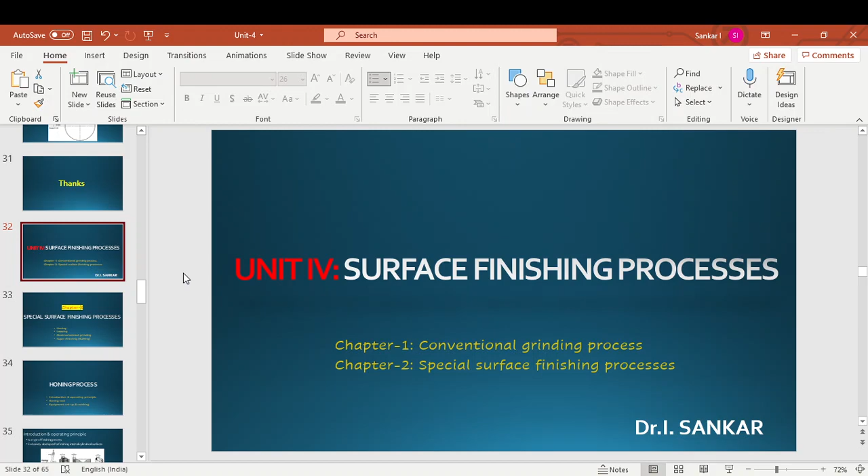We are in the discussion of the fourth unit, surface finishing processes. We have already completed discussing the conventional grinding process, and now we are going to discuss the special surface finishing processes. This is chapter 2 in that unit. We are going to see 4 different topics in that chapter: honing, lapping, electrochemical grinding, and a super finishing process, that is buffing.

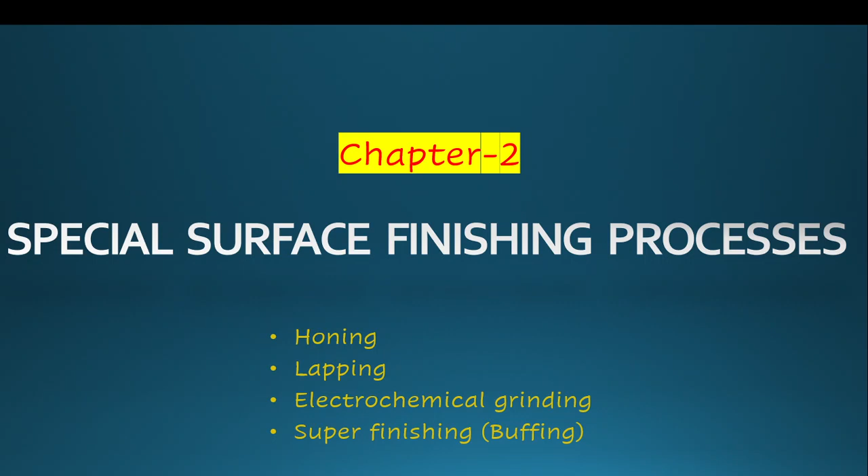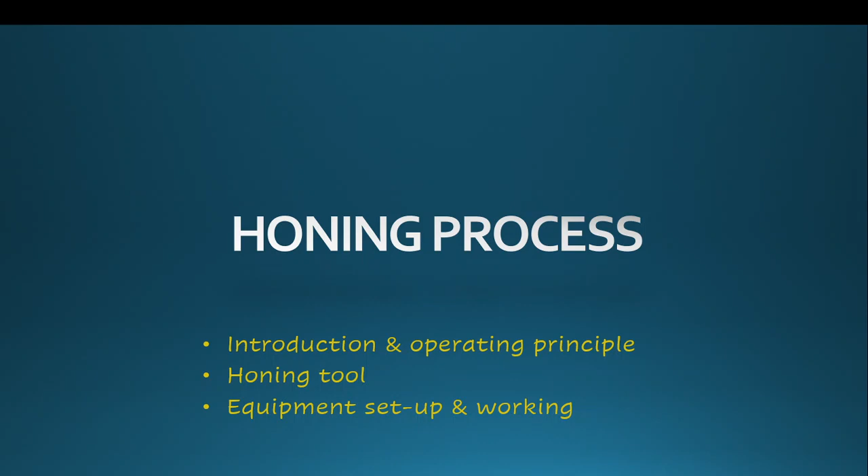First we are going to see the honing process, its basics, the honing tool and the equipment setup. The honing process is a kind of finishing operation. It is developed for finishing internal cylindrical surfaces, particularly engine bore like structures. Here you can see this part is the honing tool, a cylindrical tool loaded with a number of abrasive pads.

These abrasive pads are made to rotate inside the cylindrical workpiece in order to finish it. In addition to the rotation, the honing tool will reciprocate in order to cover the entire inside surface of the cylindrical workpiece. In that way, each and every abrasive particle will form a cross-hatched pattern inside the cylindrical surface. In this way, material removal at the micro level is carried out to finish the surface.

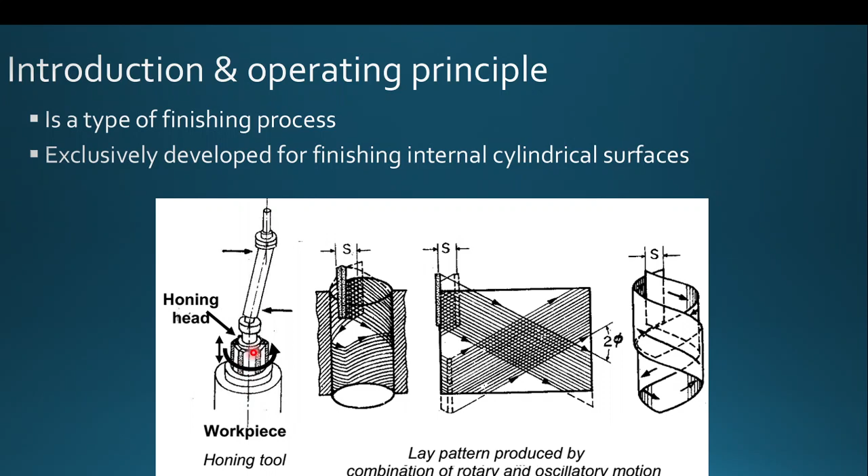The surface finish obtained by this honing process is smoother when compared with the conventional grinding process, and interior surfaces can easily be honed by using this process. This is the photographic view of a honing tool. See, this is the abrasive pad. These abrasive pads are generally on the outer side of the honing tool.

During rotation, due to the centrifugal force developed, these abrasive pads move radially outward to touch the internal surface of the cylindrical workpiece. This is the workpiece. No movement is given to the workpiece in this process. Only the tool needs to rotate and reciprocate inside the workpiece in order to finish the interior surface.

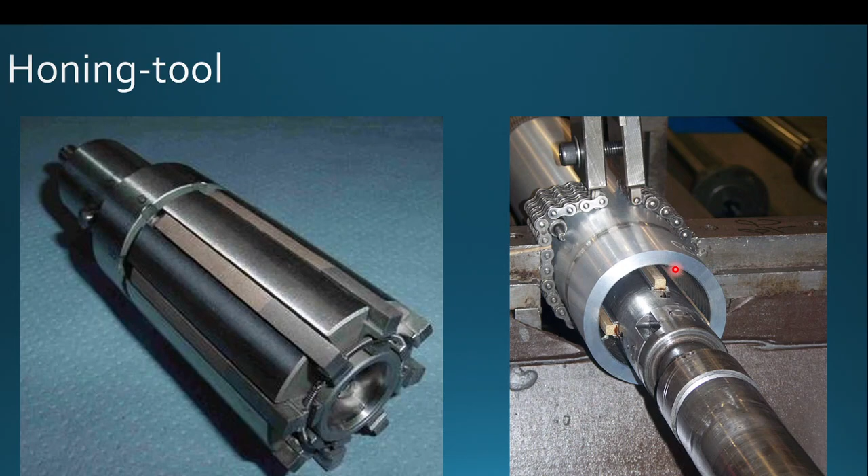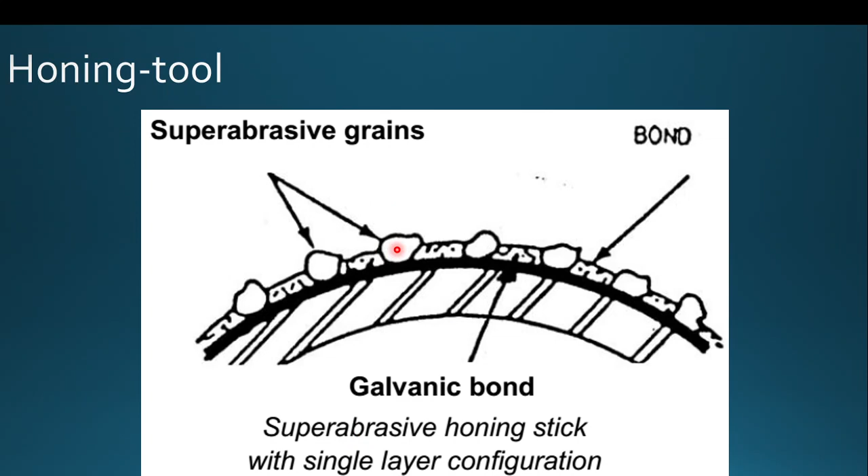At the time of rotation, radially outward movement happens for the abrasive pads of the honing tool. This gives a firm pressure over the internal surface of the workpiece, and meanwhile the abrasive action takes place to finish the surface. When you have a close look at the surface of the honing tool, the super abrasive grains are loaded on the abrasive pads using galvanic bonding material. This is the bonding material. These particles are the abrasive particles. The super abrasive grains are very fine in size.

This process is generally carried out with the help of a honing machine. This is the honing machine. This is the column, and this is the honing head. The honing head has the driving mechanism, and it is able to slide up and down in the guideway provided on the front side of the column, and at the end of the spindle we have the honing tool. This spindle is connected with the driving unit, and during the reciprocation of the honing head, the spindle rotates the honing tool inside the cylindrical surface of the workpiece.

This is our workpiece, and this table is able to move up and down in order to load and unload the workpiece. Beyond that, no specific movement is given to the workpiece during the operation. It is a vertical spindle honing machine.

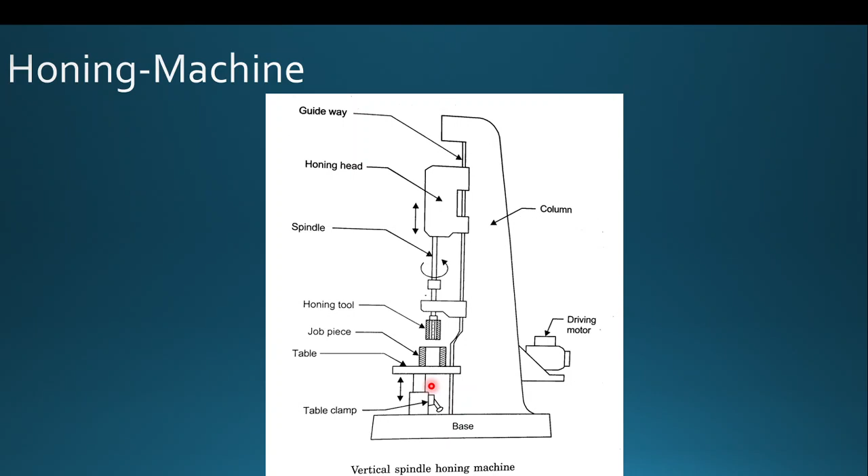The honing process constraints are: the honing stone should not leave the work surface during the operation, and the stroke length should cover the entire work length. In that way, the honing tool needs to reciprocate inside the cylindrical workpiece, and there is no need for the honing tool length to equal the workpiece length. Because of the reciprocating action of the honing tool, we can use a smaller honing tool for longer workpieces also.

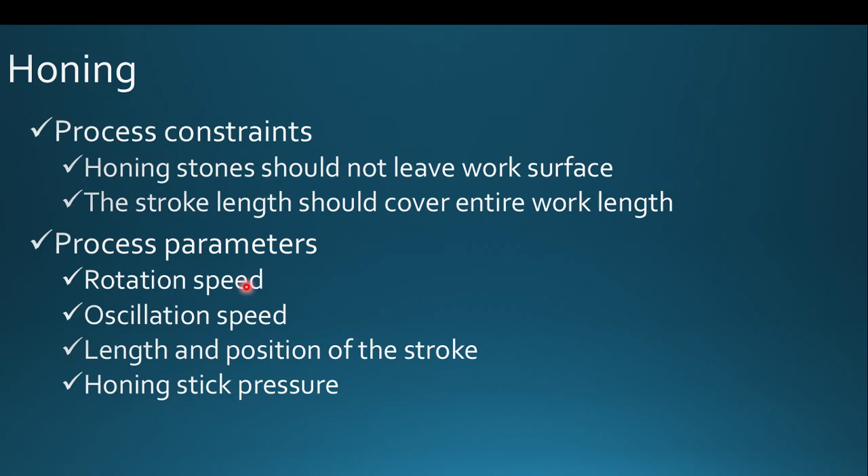And the important process parameters which are all influencing the surface finish and quality are the rotation speed of the honing tool, the oscillation speed, that is the reciprocation movement, the length and position of the stroke, and the honing stick pressure. These are all the important process parameters which are all influencing the finishing quality during the honing operation.

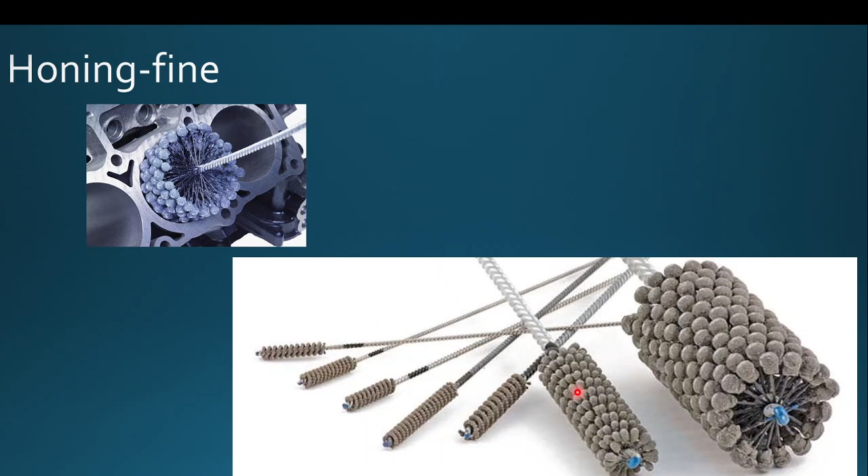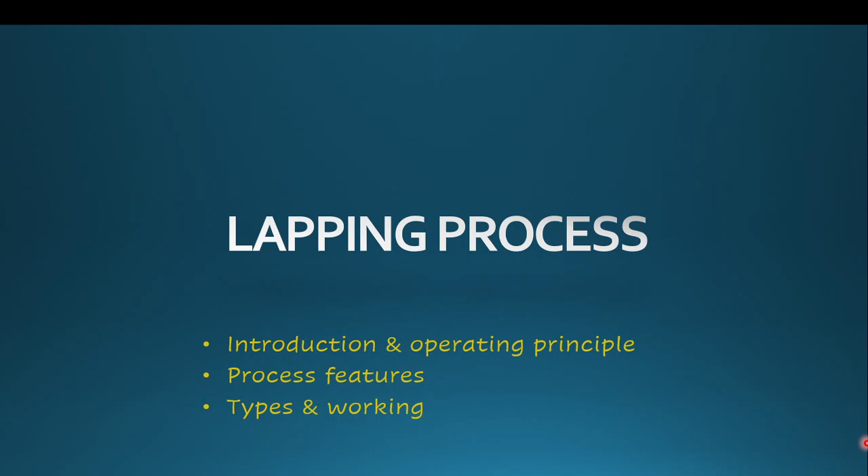Next, we can discuss the lapping process. Lapping is somewhat better when you compare it with the honing operation. Based on the smoothness and the fineness of the surface produced, we can arrange the various finishing operations starting from conventional grinding, then honing, then lapping, then electrochemical grinding, finally buffing. So in that way, now we are going to discuss the lapping process.

So the lapping process is very similar to the honing process, but some changes are there. It is actually a kind of abrasive process and it's a very old method of surface finishing. Here the lap is the tool which is made of metal and is made to slide over the workpiece, and the abrasive particles in the form of loose powder are spread over the surface of the workpiece, and then the metallic lap is made to slide in a random manner over the surface of the workpiece.

And along with the vehicle liquid, the abrasive particles are made to slide here and there, and due to the applied pressure and movement from the lap, the abrasive particles will remove material from the surface of the workpiece in order to finish the surface to better quality. So the important process parameters and things relating to the lapping process are mentioned in the slide.

Various kinds of abrasives used here are aluminum oxide and silicon carbide with grain size 5 to 100 micrometers, Cr2O3 with grain size 1 to 2 micrometers, B4C3 with grain size 5 to 60 micrometers, and diamond with grain size 0.5 to 5 micrometers. And the vehicle materials used here are machine oil, rape oil, and grease.

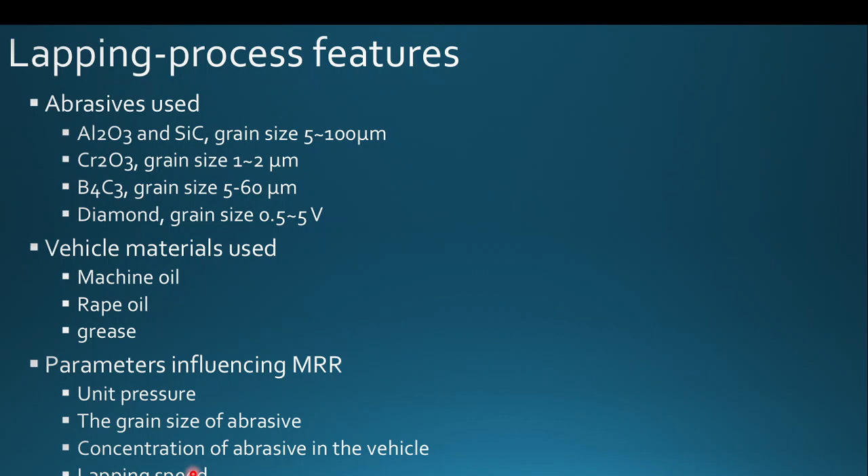And the parameters mainly influencing the material removal rate in the lapping process are the unit pressure, which is given through the top, and the grain size of the abrasive. Coarse grains will develop a coarse surface, fine grain size will develop a fine surface. And the concentration of the abrasive in the vehicle: more abrasive particles will increase the material removal rate, fewer abrasive particles will give you a very low material removal rate. And the lapping speed, how fast we are sliding the lap in the random direction.

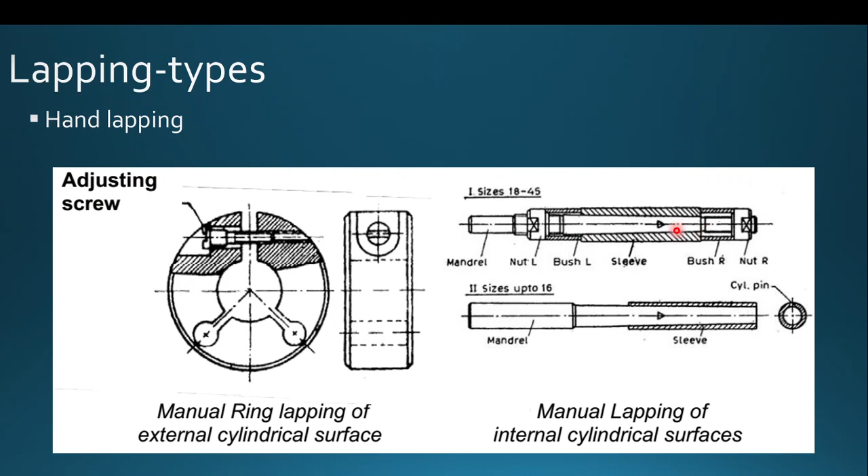So lapping can be divided into two categories, hand lapping and machine lapping. Hand lapping is the conventional one, and here internal cylindrical surfaces can be lapped by using these hand lapping tools, and machine lapping can be used for surface lapping. See here, this is our lap material. Generally cast iron and brass are used as lapping material, and this is made to slide over the surface of the workpiece.